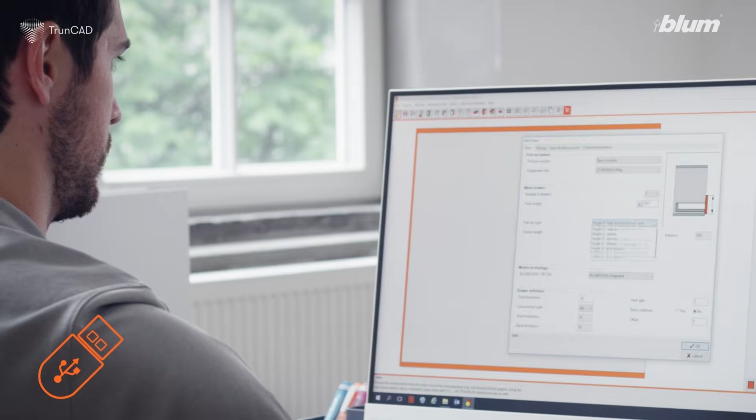In today's webinar, we will show you how TrunCAD makes planning a hallway cabinet and a sideboard child's play. We'll also demonstrate how you can transfer the data wirelessly via CAD to BXF directly into EasyStick and the Mini Press Top. This collaboration between TrunCAD and the Blum Group gives a seamless process from the digital planning right through to the very last hole. Our objectives today are to save time, reduce errors, and perfect drilling patterns without the complexity of CNCs.

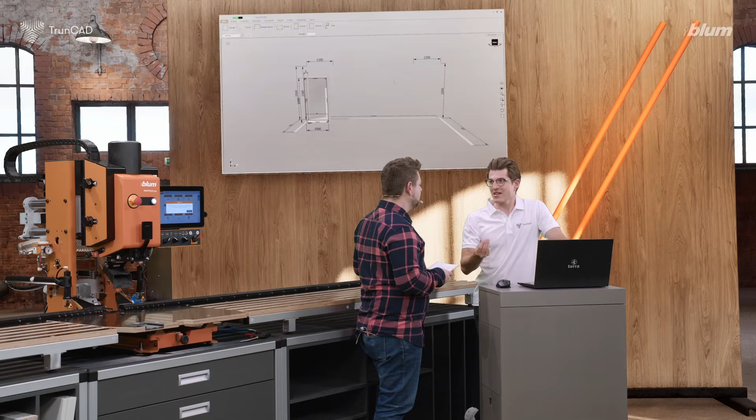Also, they go back to the office and send it to the customer. If the customer wants changes, they have to design it again, so that's done twice as well.

And then, of course, once the customer gets a quote, they may need to redo it because the customer wants something different, or it's not okay with the pricing, which means they have to do things twice.

So in the end, your customer has a seamless process. You visit them, show them what you mean, they get a pricing, and once they say yes, it goes straight to production data.

Okay. You create standard templates for your customers that cover the bulk of planning, as you said before. Why do you do that, and what does that look like? Exactly. So we are a big fan of having good processes also with our customers, and customers that have good processes already in place. So a template is not just a template of any cabinet. It's how does the company work? How does the cabinetry usually work where they are?

So what connectors are they using? Hopefully mainly Blum in this case, of course. But also how are the back walls constructed, how's the plinth constructed, etc. So that there's a logic. TrunCAD thinks about the logic, checks for logic errors, and then of course reduces the risk for errors. And on the other hand, it speeds up everything because it's just very well in the standard. And then you've got the time for the special bits where you need to go away from the standard.

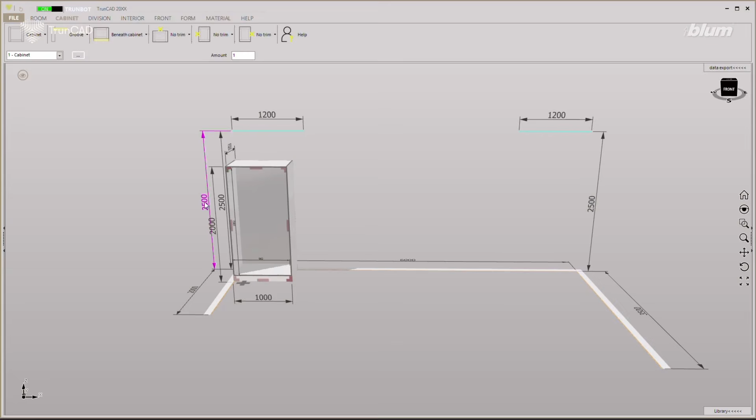Coming back to you, Yannick, can you tell us and show us a little bit about TrunCAD's main functionality and how does it work? Sure. So generally speaking, TrunCAD looks like this if you open it. It looks kind of like this because, as I said, it will always be adapted to whatever customer opens it. So maybe you have a different cabinet or just a single piece in the corner right here. Now, you see there's also a lot of dimensions right here.

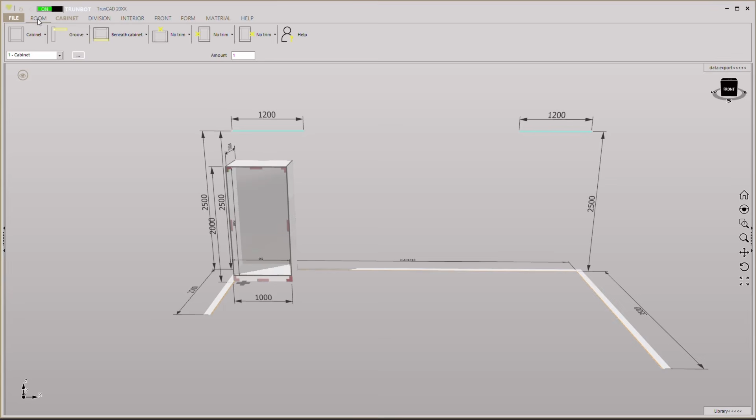Everything you want to change, you do it in 3D using the smart clicks, using the millimeters right here. And if you want to add something, you do it from the top menu. And if you've understood that, you've already understood like 80%. So everything we're doing now, we do with the mouse and just the number pad. It's very important for us to have a software that works without 100 menus and sub-menus and all the key combinations that you have to learn, etc.

So let's just say I have a quick example. We want to change something, so we click it. So let's just change the position of the cabinet. We click the positioning smart click. Distance to the left, for example, 1500, we press enter, and there we go. The software does the rest. Now that does not only shift things around, because you can also just drag and drop it, but for example the height of the cabinet really affects something where you usually have to change something, draw something new. Just enter a number, press enter, software does the rest.

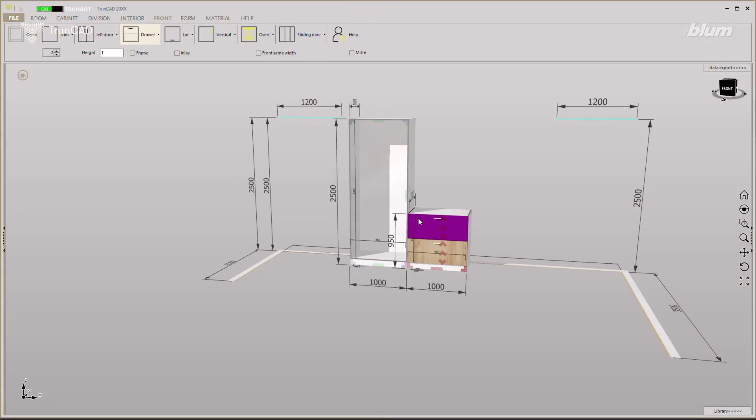Now, of course, there's also different functions, classic functions like copying stuff, but then also changing things in height. So let's say we have a lower cabinet and there's something already in. So we maybe go to the front and your customer says, okay, I want two drawer boxes in here. Now I want to change the height of this one because it needs to be a different kind of wardrobe. You can always change anything later on, like just make the whole thing a little bit smaller. Or if we have a look at it, you see there's not just dummies, but actual drawer boxes in here. In this case, we have chosen the Merivobox.

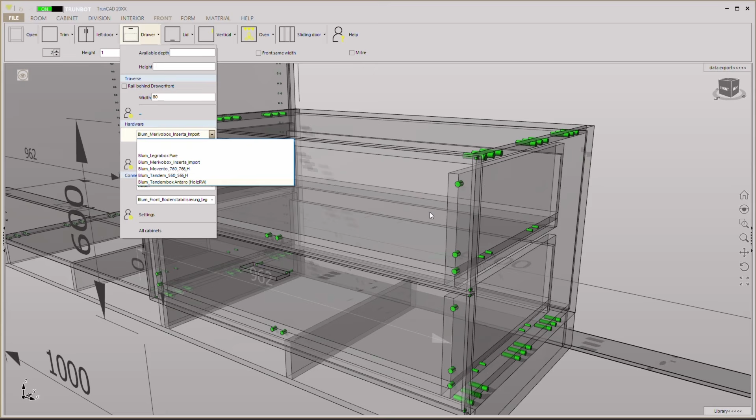Of course, you can also choose plenty of different drawer boxes. Oh, I think Merivobox is a good choice. We stick with that. Perfect. So we're sticking with Merivobox.

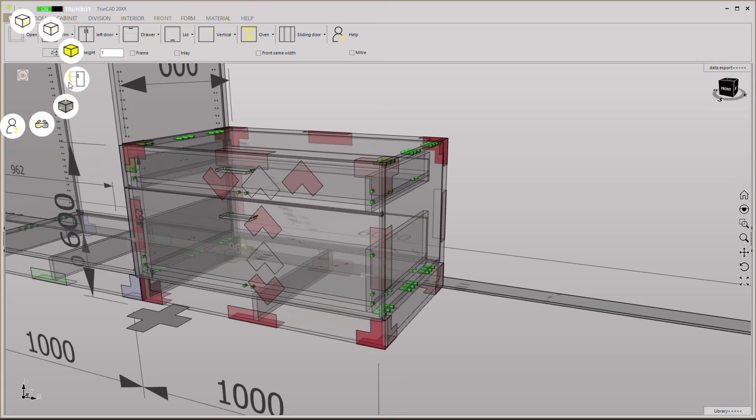And in this case, maybe the customer wants the upper drawer box to be a little bit smaller. So again, we just click the drawer box because we want to change a different dimension, 150, enter, and you see up here it's chosen the right size again. The upper one is smaller, the lower one is larger, and everything in the background runs correctly. You don't have to always double check by looking into the cabinet, but just to show everyone that it actually works there. That sounds very logical and straightforward to me.

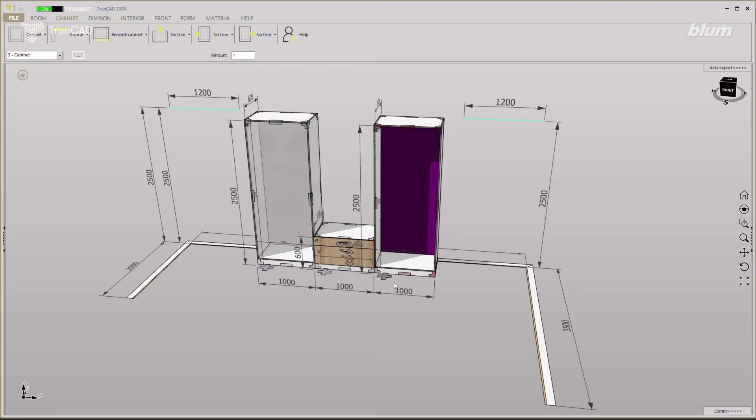And you started planning our cabinet that we want to do today. What's next? We're planning here a wardrobe and a sideboard. So it's very easy with drag and drop, maybe the next cupboard here. Exactly. So I'm just copying another cupboard. I just copy the left one to the right again. Of course, you can also just drag and drop one from up here maybe. So there's plenty of ways to go for it.

Drag and dropping is, okay, that's the wrong connector that I've put it to, but generally you drag and drop what you want to have in there, and the software does the rest of the calculation. Now, over time, of course, you will have a well-working library for your company.

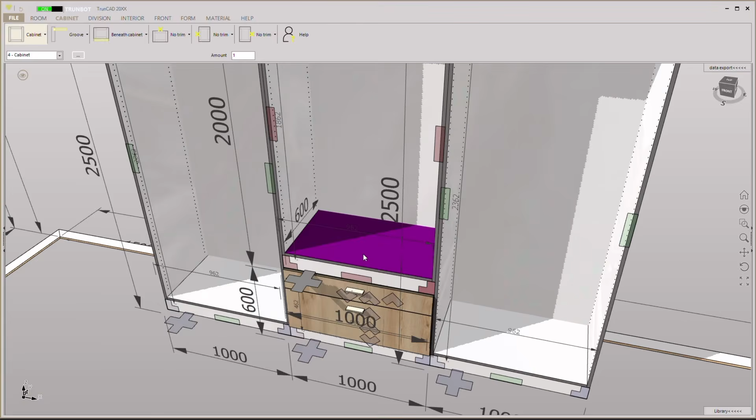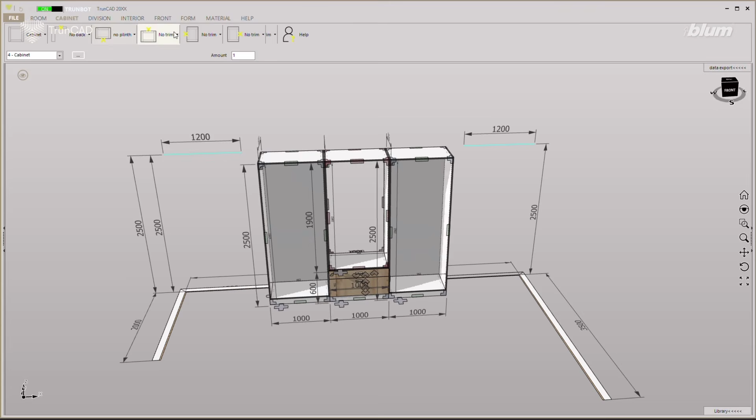See, if you do it right, the software does it right as well. Now we want to fill up the space, so just an empty cabinet maybe, 1900, and let's just use this one with a removed back wall. So we just go to the cabinet, no back, because it should be an open area. And you see there's a parametric function for everything. So adding things to it, removing things from it, adding pieces, removing pieces, but also, of course, the interior you've been speaking about, drag and drop.

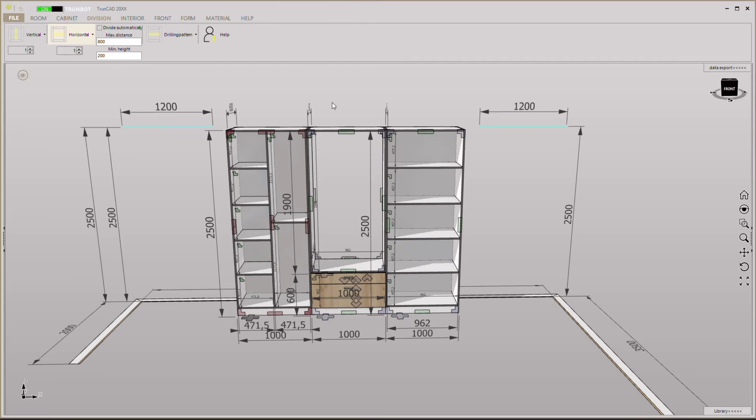So you just drag and drop, for example, a vertical, some horizontals, just add the number, how many things you want of what, and then drag and drop it in. And the software does all the rest. It always comes with all the connectors, all the drillings, all the millings that maybe need to be done, and then you've got your cabinetry design just ready.

And the customer sees what you do, he understands what you do, and he can reflect and say, okay, do I want maybe this area a little bit bigger because there should be an aquarium? So we put the height 950, enter. You see this area gets bigger, other areas get smaller, and that's good to go.

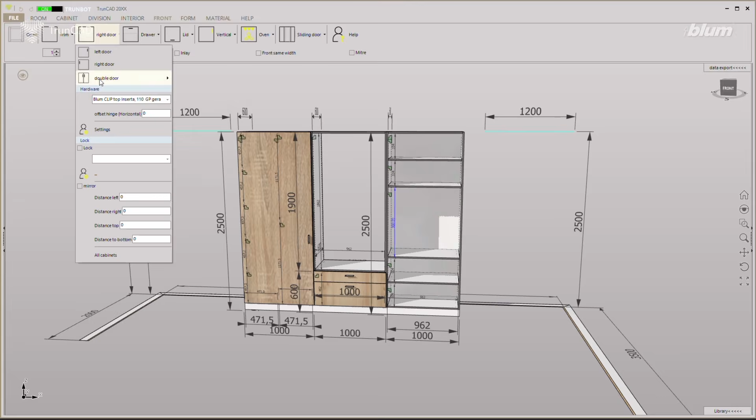And how do you handle any retrospective modifications? So let's say the customer wants something different, maybe even in a more complex way that also affects other things. So let's just remove this one. Maybe we have this right area now with 2 doors. Okay. We just do 2 doors in here. And now the customer says, okay, I really want this cabinet to be stretched out to the right a bit. So you can just say, okay, I just want it with 1500 instead, and the cabinet will be bigger.

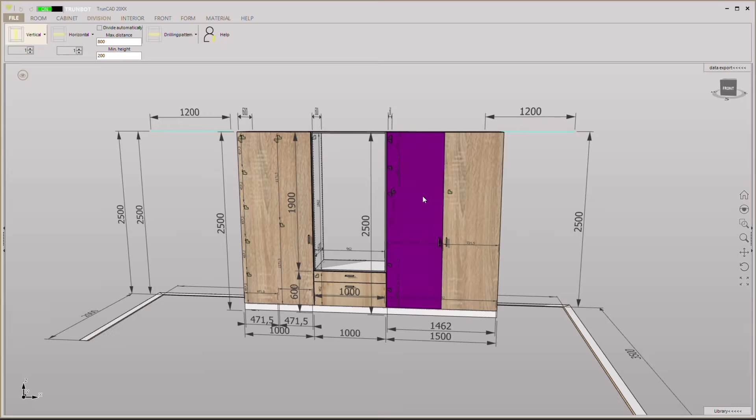Now, maybe the customer decides, okay, I want it completely different. I want more dividers in there, so we can add verticals to it wherever we want. So you see it's a vertical in addition, but also you can exchange stuff very easily. So let's say we want to remove the doors again and make it a little bit smaller, maybe just 600, and have just one door.

So it's very easy. I can tell from seeing you planning the things. But you are very used to the software. How long does it take to get used to it, and how do you support your customers at TrunCAD for that? So there's plenty of customers who just basically open the software and they are good to go.

Because it's very logical where things are. Now we do have plenty of learning videos, webinars, online academies, etc. But there's also training for every customer. This can be in the onboarding process when they buy the software new, or you can of course also get a personal training. So it comes in different stages depending on what you need.

Mhm. So while Yannick is doing the sideboard, I can tell you the entire planning process was live, no editing at all, nothing done in advance. So I think this demonstrates really well the advantages of TrunCAD, and it's very, very fast. So how does it look with our sideboard?

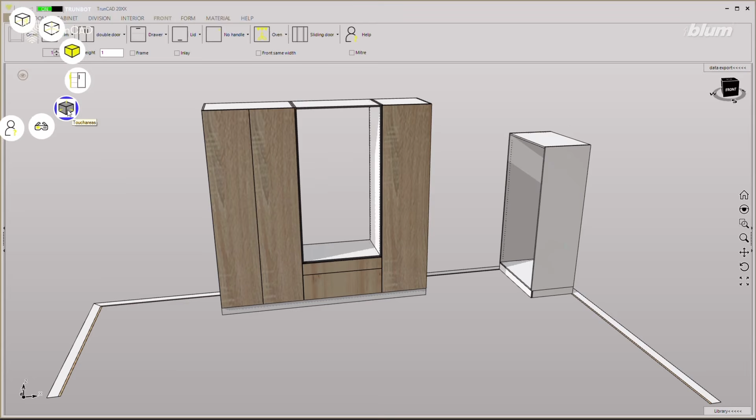Created another cabinet to start off with the sideboard. So starting off with the sideboard, we're just going to change views. Of course, there's a lot of settings you can switch through. That's one thing where you can actually use key combinations, but we don't have to. It's just even quicker then. We move it to the right, and you see it's just the same again, just as we did before. Reconfiguring things, you click the number, add a different number, and the software does the rest.

Okay. Changing the height, changing the width, the same. You click it, software does the rest. You add something to it, let's say cover panel, you click the cover panel, and that's it. Maybe overlap to the front. So there's a parametric function for everything.

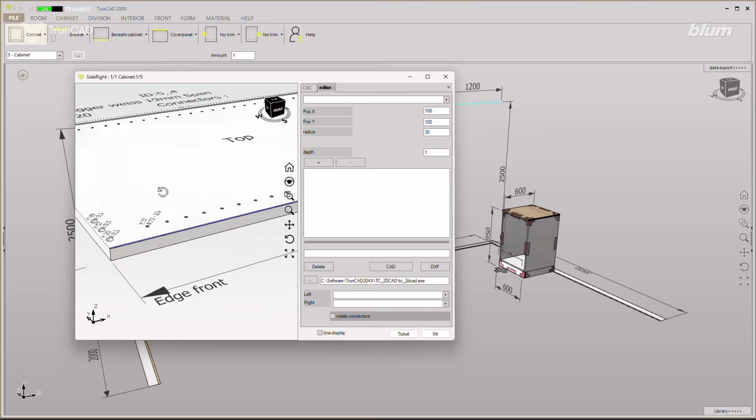Now, if you want to have very special changes at single pieces, for example, there can be a cable outlet at the side, or you want a free shape on one piece, of course, there's a single piece editor for every single piece where you can have additional outlets, special shapes, rounded shapes, whatever. We'll stick to the normal shapes for this moment, due to time reasons, and also sending it to the mini press then. Drag and dropping some drawer boxes in.

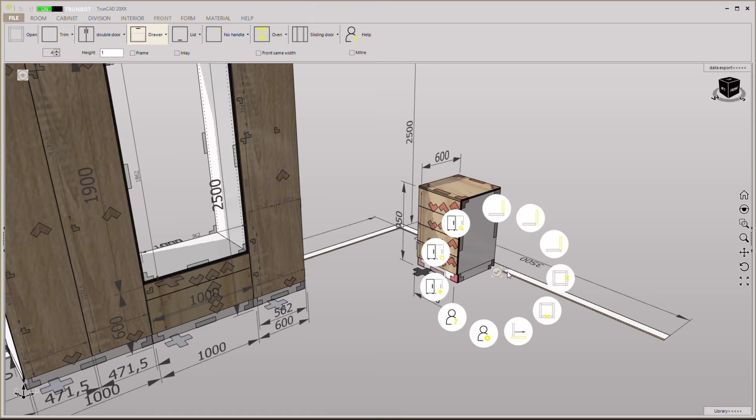Again, everything's already in there, all the drillings, all the holes, everything's in it. And we can just, for example, now copy this to finish the sideboard. Now, what we're doing with copying, it's a smart process. We're also hitting pieces that should be connected, like the cover panel will now go all the way through. So there's one piece now.

And just like this, you're creating a very simple presentation for the customer, because if we're removing all the smart clicks, you can actually see, okay, that's something that looks already like an actual cabinet. Maybe the customer has some different ideas. Can be material, can be the door style or whatever. So of course, there's also a lot of door styles like framed doors, shaker style doors, and everything that can be easily adjusted just by one click.

But of course, you can also choose with the customer their material. So drag and dropping material will show them, okay, that's how it looks in gray. That's how it looks in wooden structure or spray painted or whatever. Mhm. I think it's very fast right now, but you're always looking for other ways to speed up things in your workflows at TrunCAD.

I've heard that you are working with artificial intelligence, so you can take a picture and use that to create the final model. So does that mean that if my wife sends me a picture on Instagram or Pinterest, we can easily have a look and get a creation of that furniture? Sure, that's the idea behind it. It's mainly for the Tron shop, because we have two different products. Number one being the TrunCAD software that we see right here, which is more for the professional side. We also have all the drillings, millings, everything.

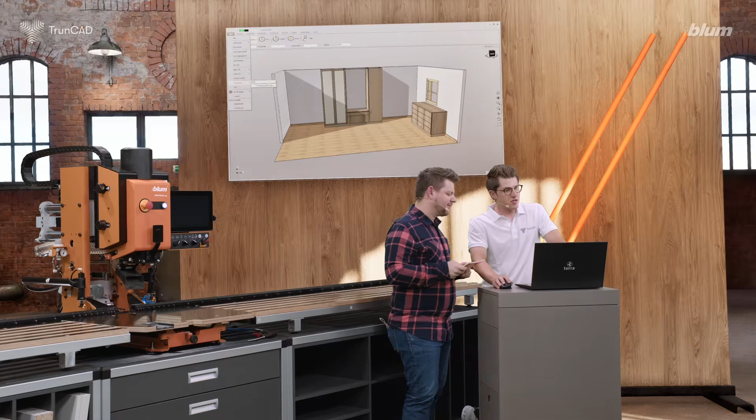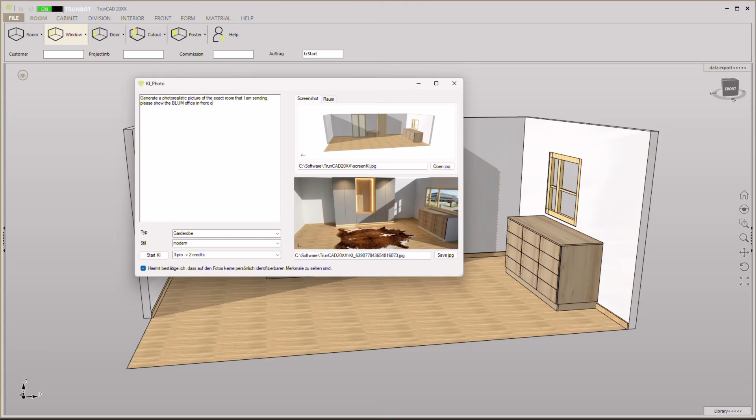So let's just use the normal AI rendering now. We just started the render engine. There's our picture from before, and we are using the prompt on the left. So we can say, all right, let's generate a photorealistic picture of the exact room that I'm sending. Please show the BLUM office in front of the window, and also... So very easy, ladies and gentlemen. As you can see, Yannick is now typing with AI what we want to see in the picture, and within seconds we will have a great overview of that.

And I think that really helps, because a lot of customers can't imagine how that will look in their room, or how the planning will really look when it's done. Exactly. That can also be used if you, for example, import a second photo. You can also import a special material that you want to show the customer. Of course, you can also just import it in TrunCAD. But for quick presentations, it's sometimes easy to give everything to the AI, and the AI gets you a perfect picture, and that speeds up the customer communication. And as you said, you also get the price list within seconds if it's connected. Exactly. So that helps also.

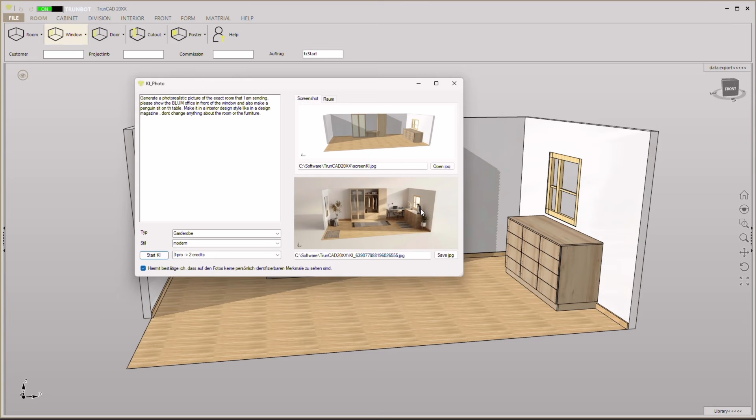So there's already the picture rendered. I've written in it that there should be a penguin sitting on the table. So you see there's the little penguin up here. And there is the rendering of the cabinet. It didn't change anything about the furniture itself. It just put a little decoration. Now, of course, if you want something different, you can just tell it, in difference to the last picture, do blah, blah, blah, and it will do that. So yeah, that's very easy to handle.

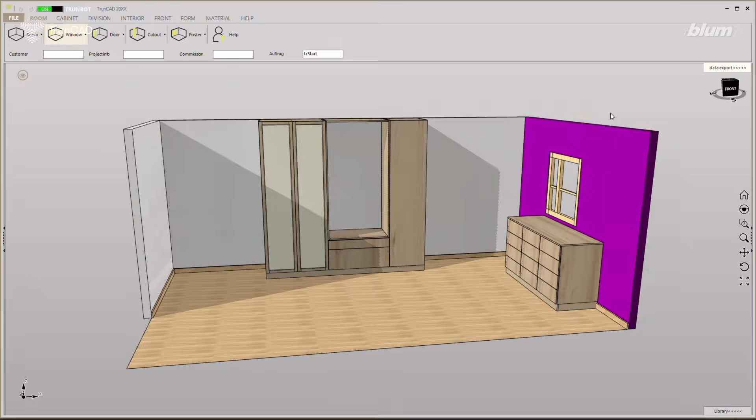Great. Now, if the customer likes the picture, of course, the next step would be pricing, like the quotation for the customer. So you just click on data export, and we just let it load for a second because it's creating the cutting list now, all the edging list, and the price calculation. Here it is, within seconds, as I said. Exactly all the cutting list, bill of material, order list, and everything is good to go.

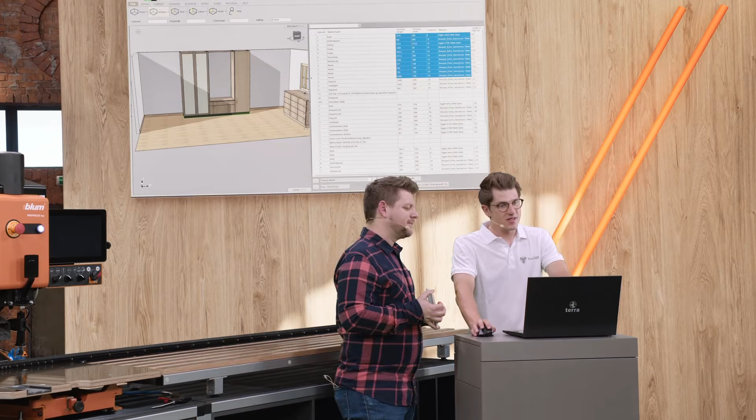How many pieces, how many panels, and of course also how many Merivobox boxes, how many dowels do we need, etc. There's a price calculation down here, and if the customer agrees to it, we can just send it to the Blum machine. We will get a panel optimization, how to cut the pieces, nice labels where there can also be barcodes on it, and then it can be imported very easily. So yeah, we can just do that.

Okay, and is that seamless workflow important for you at TrunCAD, so that you have a reliable partner like Blum? Yeah, sure, of course. Reliable partners are always very important in business, for sure, right? But especially working with Blum, we do have a partner who's having very good standardized, reliable products where we know, okay, if we put this row in order for the holes, it will always stay the same. It's easy to reuse. It's easy to configure for new customers. And of course, that makes it easy in the order process, in the designing process, but also building everything up then.

Okay, and which Blum products do we find in TrunCAD? Is there a huge list? Of course, there's the drawer boxes, there's the hinges for the doors, there's the folding flaps and everything. So there's plenty of Blum products. And of course, if there's something new from Blum, we try to integrate it as fast as possible.

Perfect. Sounds good. I now need the data, please, for Jürgen. Can you hand it to me? Yeah, I'll hand it directly to the machine. We don't need a USB stick. We just import it into the Blum online system, and it will automatically, via the CAD to BXF converter, get you all the BXF data ready for the machine. And then you can just open it on the machine seamlessly. No USB stick, nothing needed. It's all online. Perfect. Let's have a look whether our Wi-Fi is fast enough. We save this, and we're good to go.

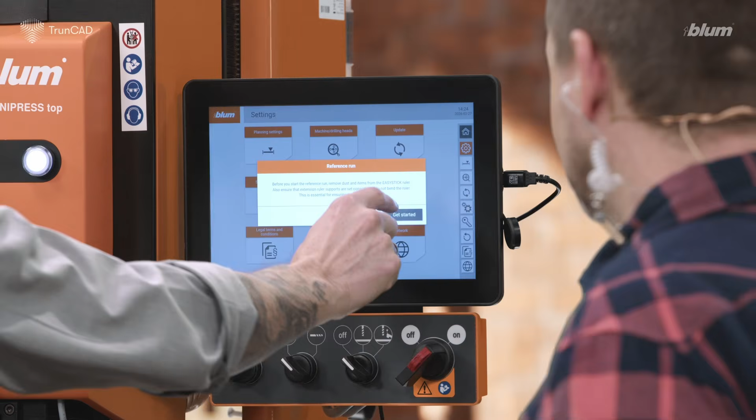Looking fancy with all the lights. First the ruler moved and now the drill head. It's the disco in the cabinet. Yeah.

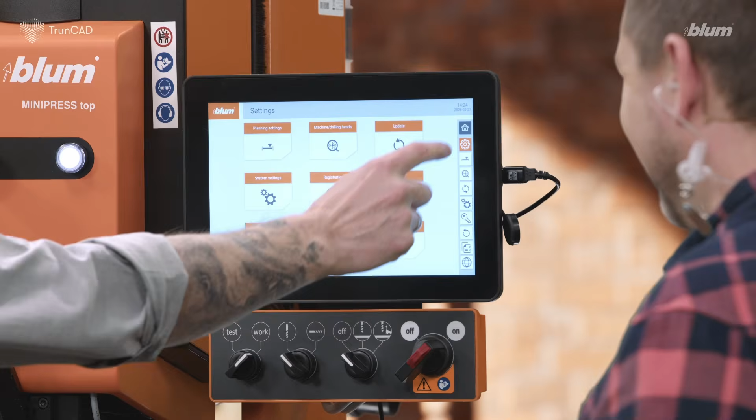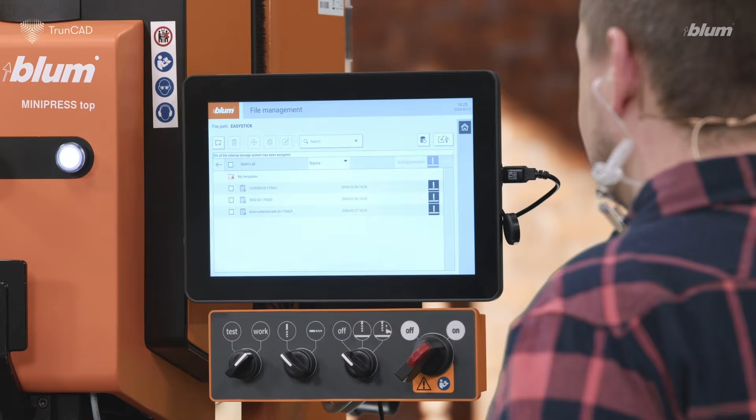Good. Now we go to the file management, and now in our cloud, and look for the cabinet. So we have a lot of cabinets in there. We choose our cabinet, make the import. And now we have the import here, Blum cabinet. We can drill it directly here in the software, or we have the option to have it over a barcode scanner, with the barcode patched on the panel. So you scan, and then you drill all the holes for the panel. Okay, that's if you have a huge variety of wood that you need and put it afterwards. Yes.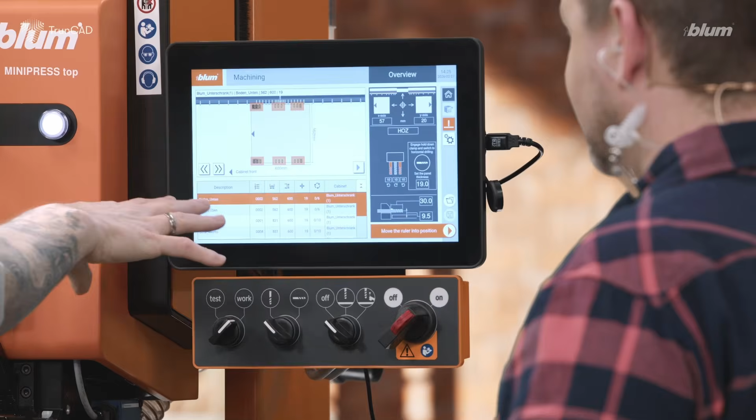Good. So we load this cabinet from Yannick now in our working row in the EasyStick. So we see here all the panels, the bottoms, the sides, and the fronts. The EasyStick computer calculates the drillings from the cabinet directly and automatically with Yannick's software. And we have now the dowels for the horizontal. So we have here in the back a horizontal gear with three 10mm dowel drill bits.

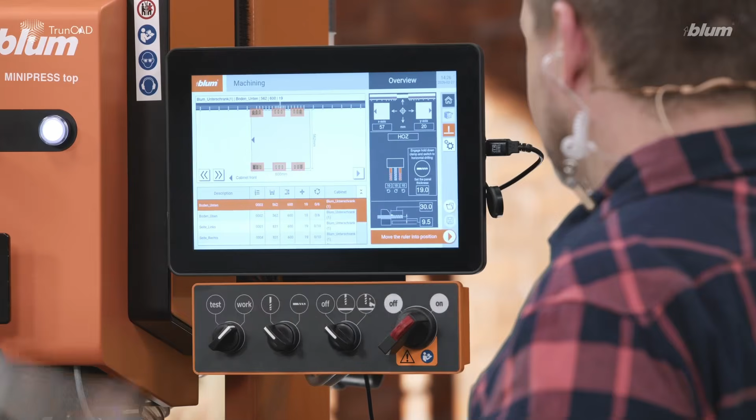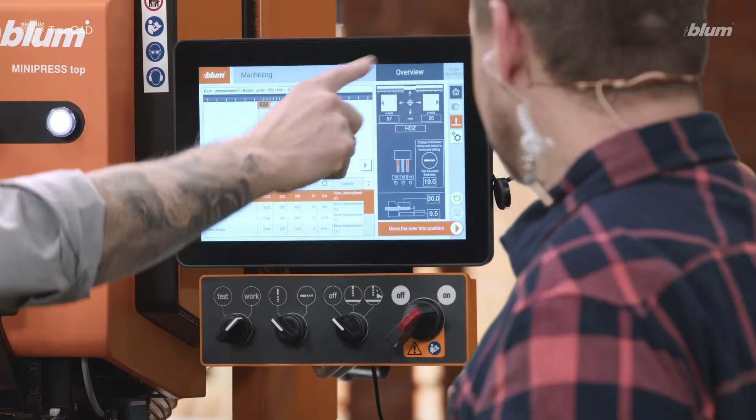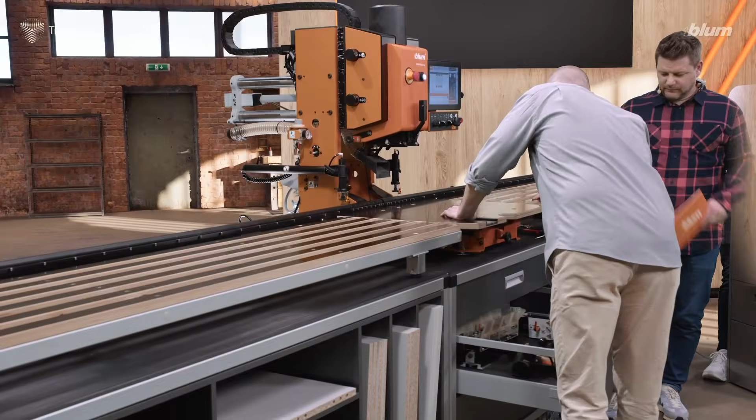We have also the hold-down clamp we have to put in. On the right-hand side, it tells whatever you need, right? Yeah, this is the adjustment side here, what you have to adjust. So we have the depth for the drillings and the height for the horizontal drillings. Then we have here the hold-down clamp. So we have a one-hand easy clamping system, very fast and simple. Okay.

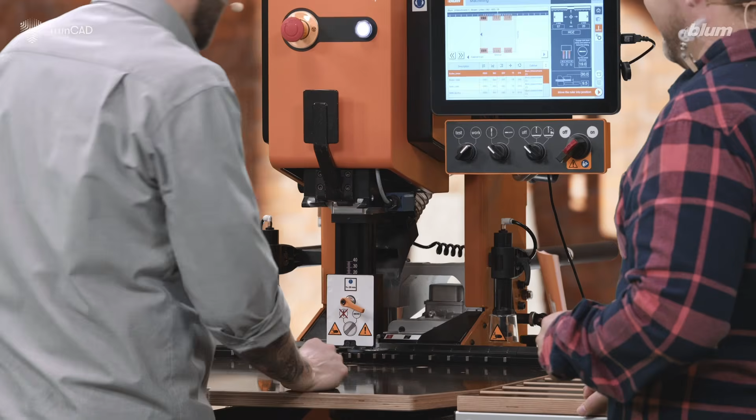Then we move the ruler to the position, and the machine moves automatically to all positions where we have to drill. So the ruler is moved. We need some wood, right? You mean? Yeah, okay. So preparation here, a board. So this is our bottom. So we have here the lights we have to touch with the board. So for the first time.

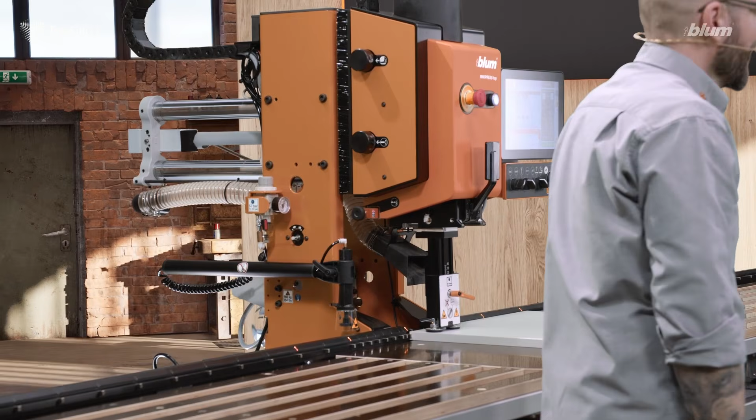One second. Okay. Before you drill, we have to tell a little bit, because normally an extraction system would be there. Ladies and gentlemen, MINIPRESS top comes for sure with the extraction system, but because of our audio in the studio, we decided to leave it off. But if you're drilling at your carpentry, you have to have extraction, yes, right? Necessary. Dust reduction is very necessary.

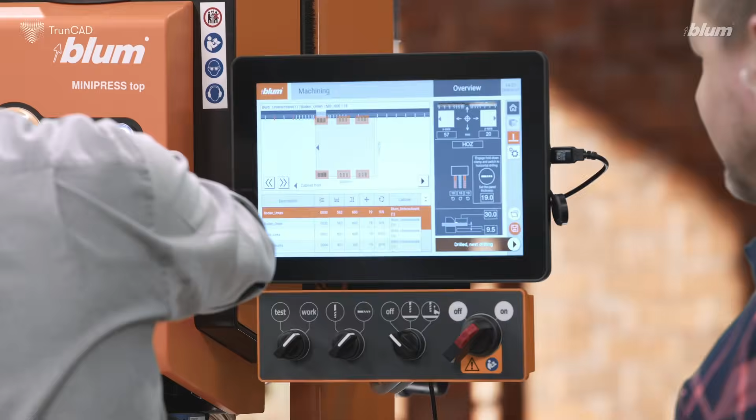So, okay, the start button is blinking, so we have to adjust on the horizontal drillings. Now we're drilling the first. So we have the first, so we go to the second one. Cut it, yeah. Okay. And the third. Third. So now we use the air pressure to clean. So the first holes are now drilled. Nine holes within seconds. Yes.

Now we would move on and make it on the other side. The other side we leave. We save the time. Sure. I think it is easy. Everyone saw it's easy, fast. So you have this on both sides, to the left and the right side. You adjust to the pins, and you push the button to the next. You go to the next button. So we go now directly to the side. Left-hand side, we're gonna do first.

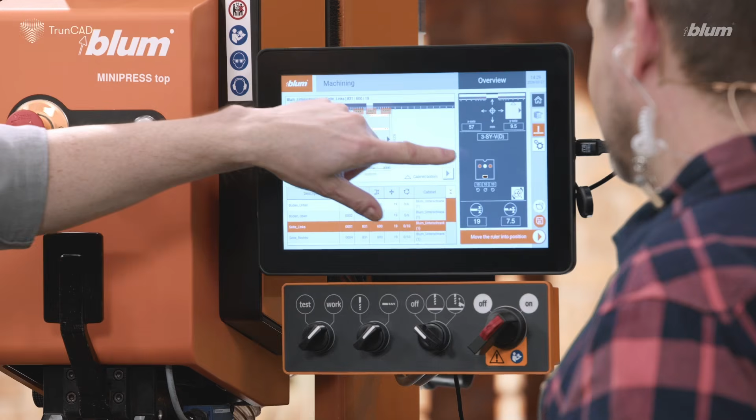So now we see here from the EasyStick software, we have now to drill the dowels in the side. So we missed this. It would be the same thing. Yeah, it's the same thing. So we see here, okay, I have to change the drill head. So we have different drill heads. So we have here to use the 3-spindle drill head for the dowels. Or we have also drill heads for the line drillings. So you have this one for the line drillings, and all the pins light up, and you use the line drilling head.

But we're now doing the side, what do we take? One more for the hinges. Okay. Special with an insertion ram, so we have to press in hinges. It's also possible on the MINIPRESS top. And we have the 11-spindle drill head. The big one. Yes. The next for the drawer system. So we choose now the drawer system. So we could get here the 11-spindle head to choose.

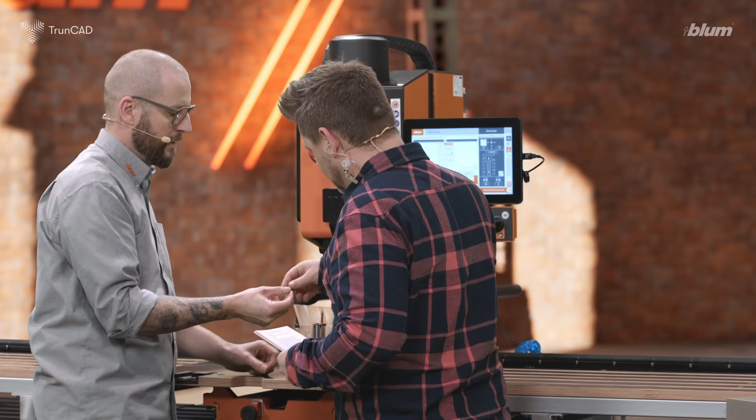So we have here the fast clamping chucks for the drill bits. This is fixed now, yeah. Only to push, put in. Everything's safe again. Yes, perfect, very easy. He shows me the drill bits I have to put in. So the panel thickness to install and the depth adjust. So we just did it before. So now we changed the drill head. Also drill head inside.

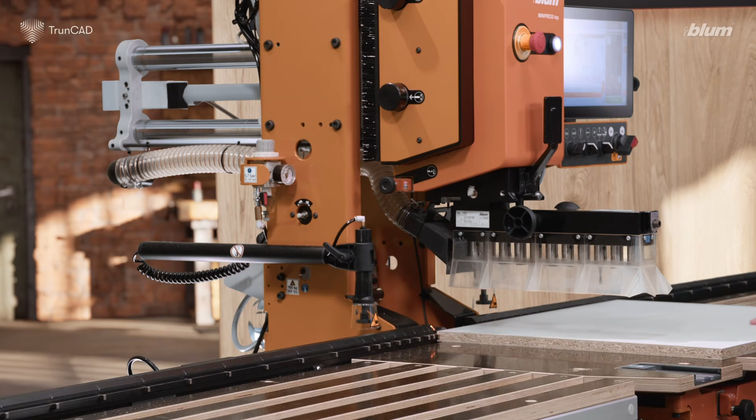Clamping, remove this one. So now, important to switch to the vertical drilling. Move the machine to the correct position. The machine is automatically moved. Perfect. Now it's finished. So we take the side. That's the front edge to the ruler. See it. Now we go. And the orange light is showing where we have to put it. That's the correct position for the runner system, for the screws.

Now we have the first. Then we push the button for the next drilling. The ruler moves. Yeah, perfect, magic. So we go to the next pin. Light up. There's the next. And so on. We go on till we've got all our parts of the cupboard. We have here next also the fronts. So you have to drill the fronts, front fixing connections. The ruler moved. It says which drill head you have to use. Everything is shown on the screen as well. So easy, I will tell.

Yeah. So Jürgen, as you showed, MINIPRESS top is a versatile machine. What are the main advantages for you as a carpenter and also as an expert?

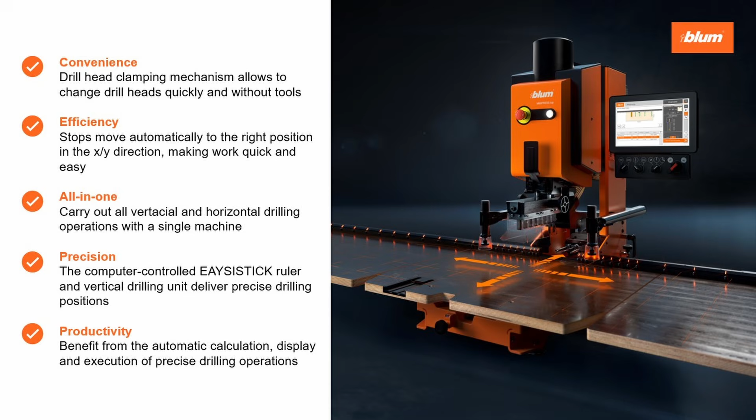The benefits is also the precision. It's very precise for the positions of the drillings. It's very easy to create the hole positions for the dowels. You can build a whole cabinet completely with all the holes you need for the handle, for Blum fittings, all Blum fittings. This is very comfortable.

Planning, and the X and Y are also versatile, always automatically in the right position. What numbers do we got up till now? For the X-axis, the ruler with the extensions, you have 2,680 millimeters maximum, and in the Y-axis, 350.

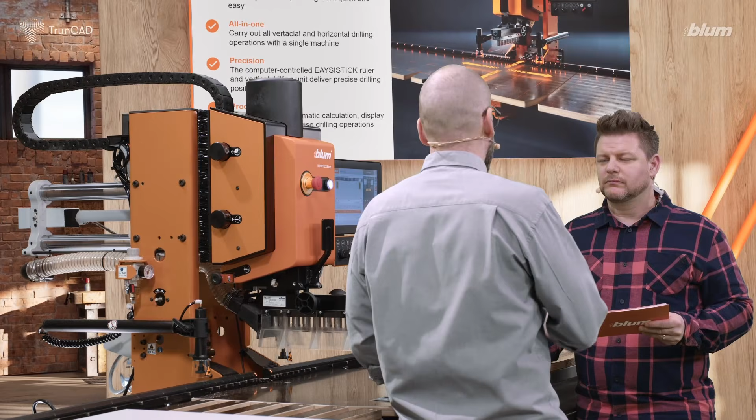So with the 11 spindle head, we have to move in the front for line drilling in the middle of the side, and you need 3 line drillings. Also possible with this machine. So it's really great to see how easy it works.

Do you need any CNC experience to work with MINIPRESS top? No, you don't need CNC experience. As a craftsman, this solution is also more than enough. You should not have 2 left hands. No, but be a little bit craftsmanship - have a little, then you can do it.

We would be done with our cupboard. So I can show you the benefits included in the software. We have only the move to position. We have the X and the Y axis. You can position on the 3 points that you need.

So you can do a line drilling with several points. You can save your own program. So you can also work on the machine without any planning done before. There's a library where all the Blum products are included - all Blum fittings are included in the software. So we have here only for front fixings.

So here's for the drawers, hinges, and for the lift systems. So we have the HF top. It's very complicated to calculate it about the catalog. So you tried it before? Yeah, you tried it.

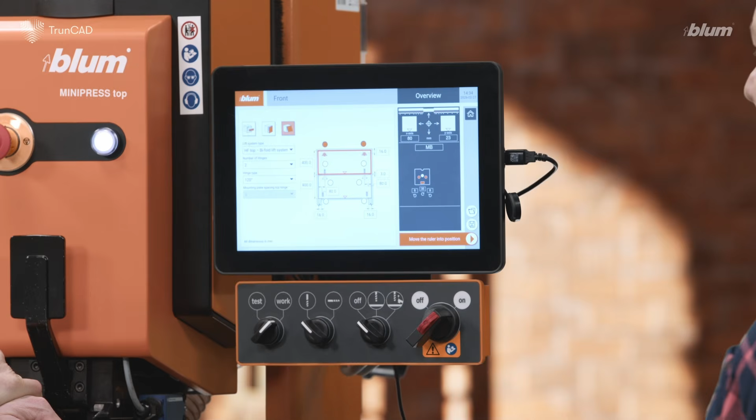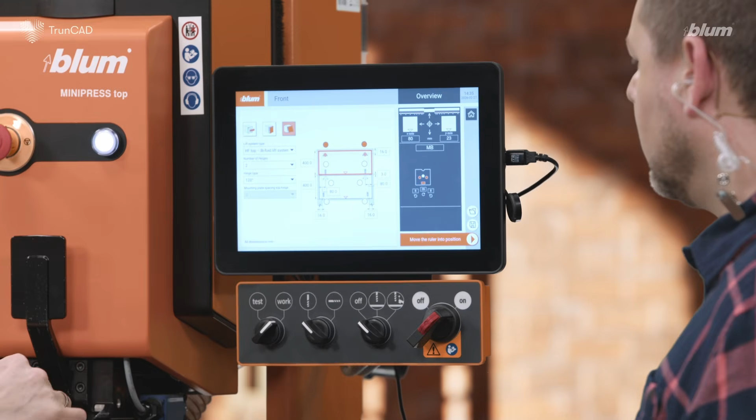Here you make all the drilling positions over the planning dimensions. This is very easy for the customer. That would be 8 holes that you have to do - just 1, 2, 3, 4, 5, 8 positions to drill, and you have an HF top.

EasyStick helps you to have that easy drill there where there's the red light or the orange light, minimizing error patterns. That's very comfortable. Great.

You would say that we've built furniture which is very easy because of the time, but you could do whatever you like with the Blum MINIPRESS top and EasyStick in combination for furniture, with some planning or without planning - whatever you like.

You can transfer the data from the Wi-Fi. It's also possible with a USB stick from a computer, if you don't need the Wi-Fi - this is the option. And you can drill the holes in whole cabinets, big or small, for all Blum fittings. This is easy to find.

You need no - how do I say in English - expertise? You don't need too much expertise. It's very easy to learn, and in one day I think you can work on it.

But MINIPRESS top is not the only machine that we have at Blum. We also see behind you Mini Press P. What's the difference between those machines? P is the vertical drilling machine - I have no horizontal drilling here.